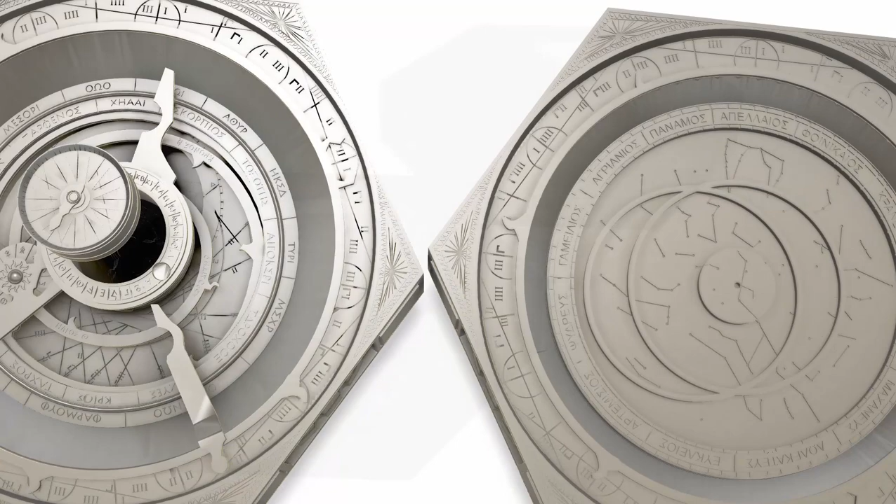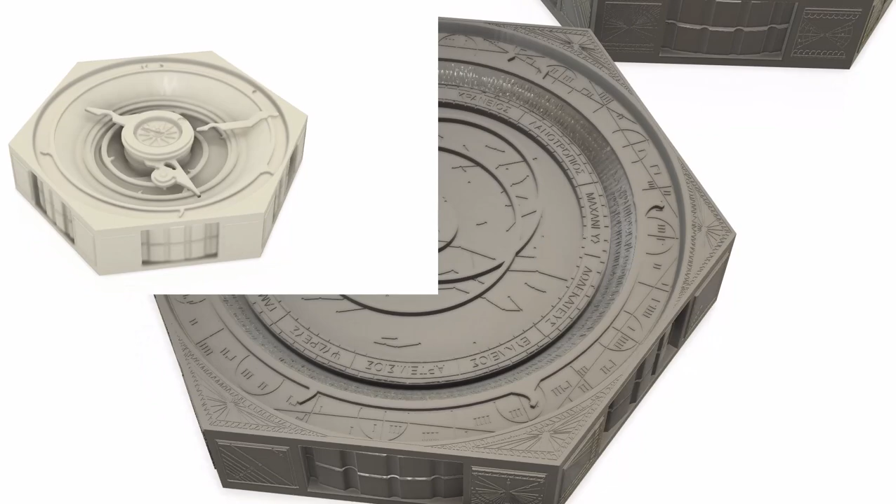In part 1, we started from scratch, carefully blocking out the rough shapes of the dial. When the dimensions were satisfactory on comparison to the reference photos, I began refining the shapes and developing ideas for articulating the dials.

In part 2, we started imparting surface detail, embossing and engraving the ancient Greek text, glyphs, and numerals.

Here, in part 3, I'll finish the embellishments top and bottom. We'll end the video with a preview of the next steps, scaling and test printing the ANTIKYTHERA replica.

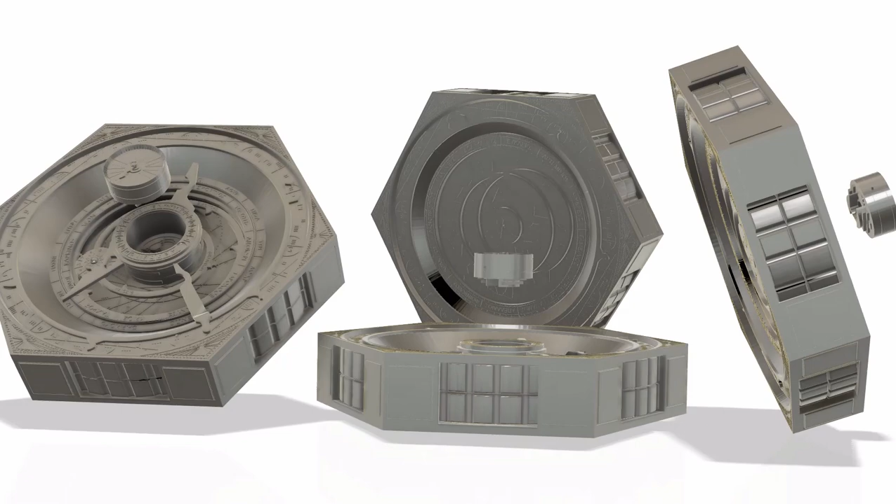Let me show you something I'm working on right now. I created these crack maps - it doesn't sound right, does it? But I've got a crack map top, a crack map bottom, and I'm orienting them, just for accuracy's sake, using this reference shot.

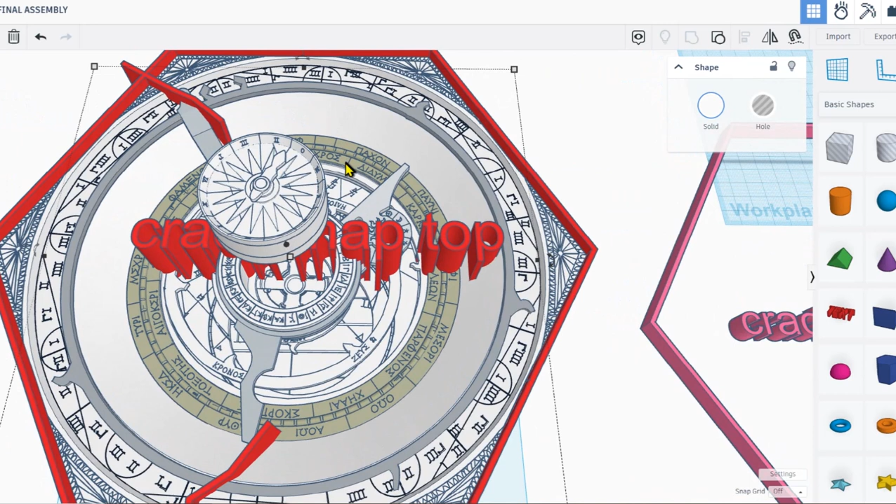This is one of the hero props, I believe. This is pretty accurate. I'm orienting this, and there's something to be said for tracing your patterns directly on photos. Thank goodness, thank you to whoever took this particular shot - straight on, it's exactly what a designer needs.

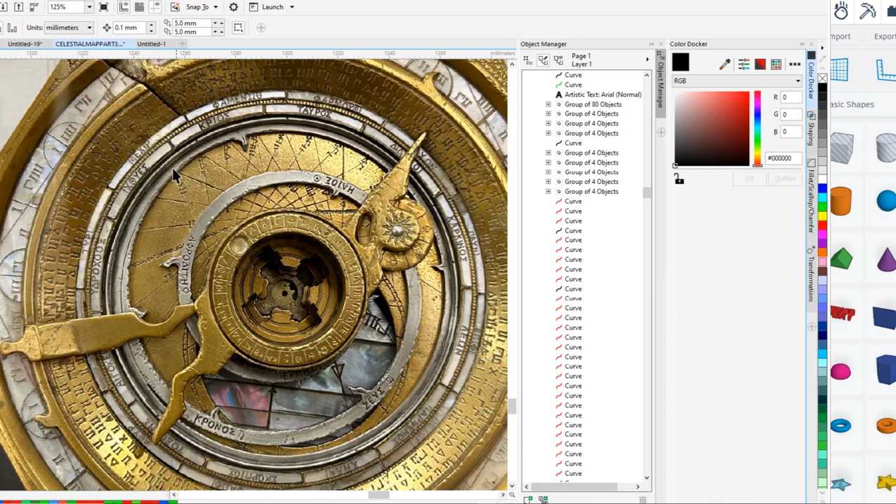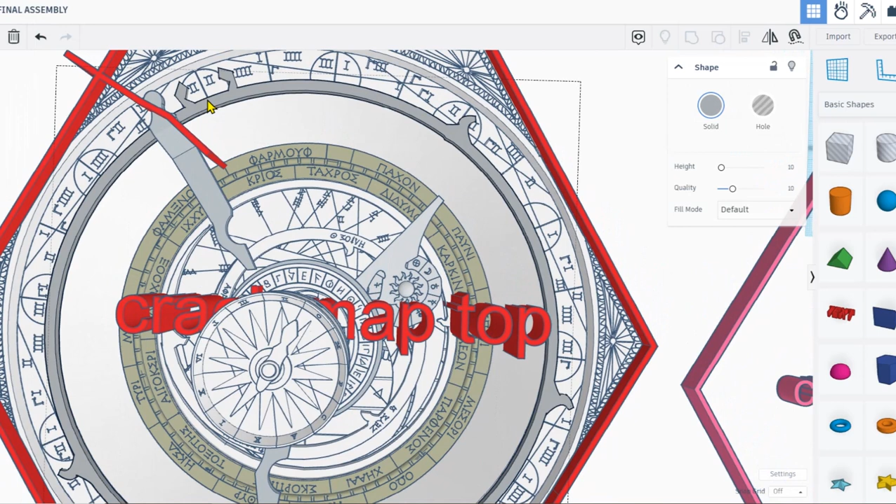I'm orienting this disc and this disc, and because I was so careful tracing everything out, that crack lines up perfectly. This lines up perfectly - and I should say the top pearl ring.

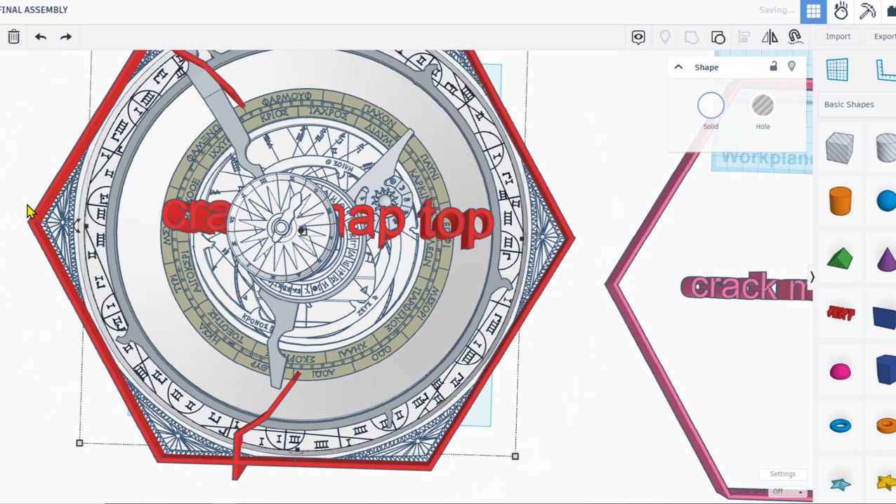During assembly, I had it a little bit askew, but because it's perfectly centered, I'm able to rotate this guy - oops, let me make sure I undo that - I was able to rotate that to find the exact position.

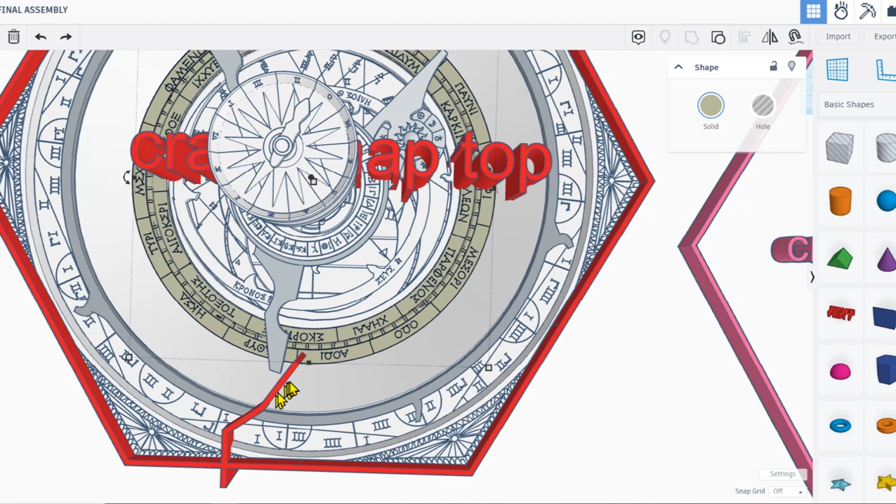Same here, I was able to rotate this guy around to make sure January orients close to that upper crack, and this lower crack goes across. I don't know what month that is, but it's all lining up great.

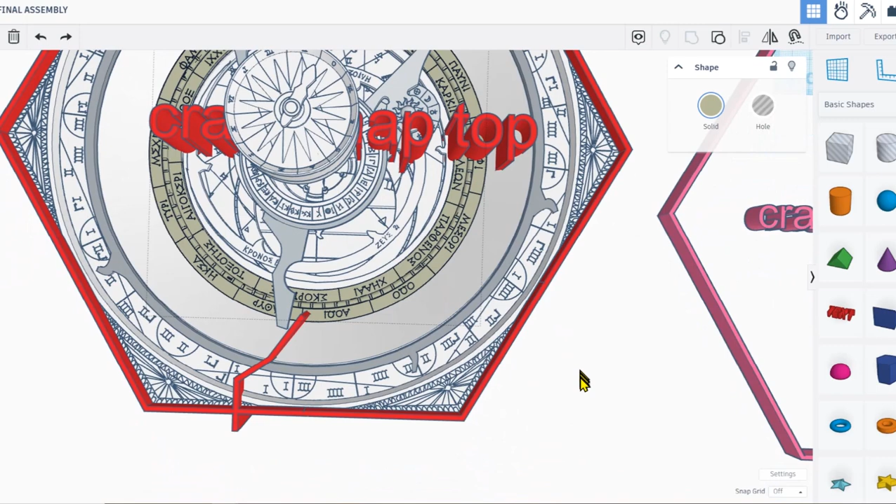So what I'll do is just make sure I got these parts oriented before I introduce the glyphs for the sloped bowl - I don't know what to call it, it's just this slope right here.

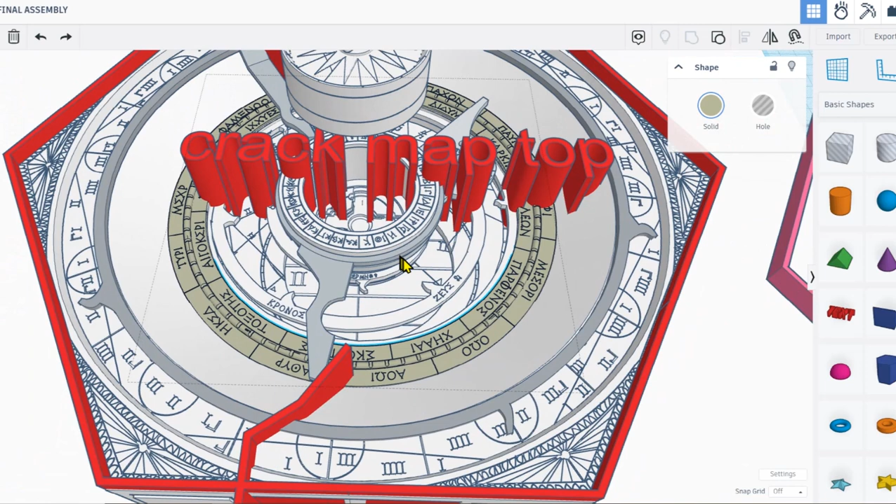I'm kind of waiting to get the rest of these surface embossing details done before I start figuring out how to separate this and introduce the segmenting of body A and B. Anyways, that's a little intro for what I'm doing here, and let's get back to the video.

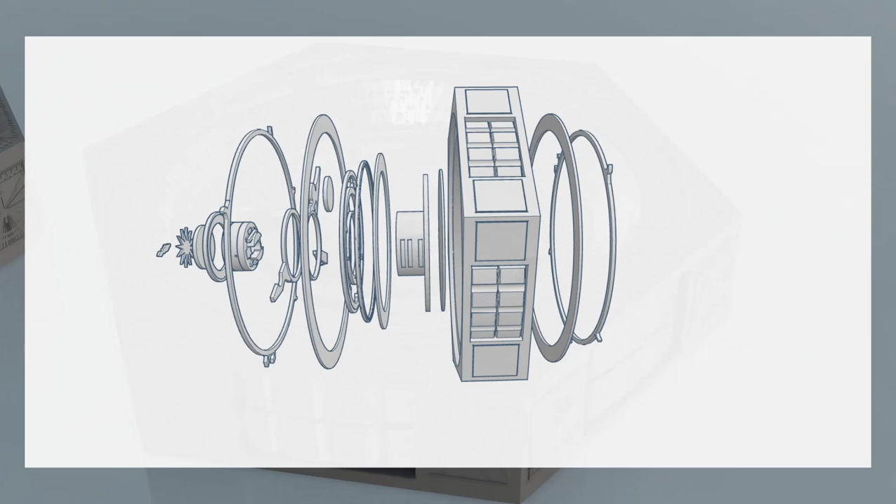Check the links in the video description to learn more about this replica and where to find the detailed build blog. In Part 4, we'll explore the final segmenting of this model, settling on its final scale, and test printing the components on both FDM and SLA 3D printing machines.